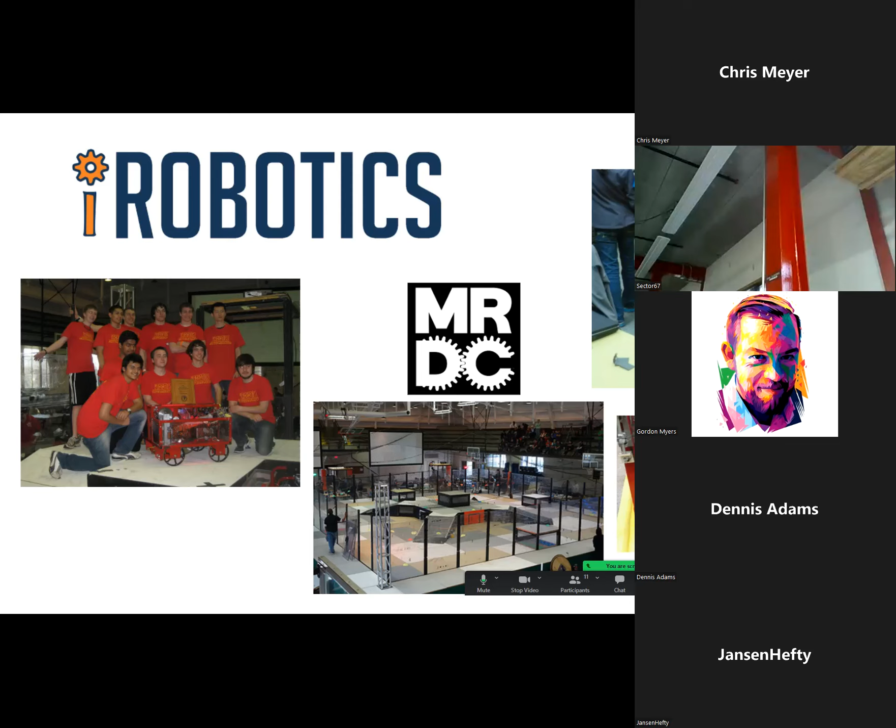It needs some repairs and some dusting. We got a control board donated to us from National Instruments, and it was programmed and controlled in LabVIEW. Well, I don't have a LabVIEW license anymore, so when we have people over for dinner and I want to show off the coffee table that can drive around, I can't drive it anymore. So one of my unlimited list of projects is to put an Arduino or something else on here that I can actually control without having to have a license for LabVIEW. But that robot is still intact, still here.

Another thing we did too with iRobotics was Vex U - Vex Robotics started up a college level competition that uses Vex components. You know, they like that because they make a lot of money off of it. It's very similar to FIRST, so I also did that.

While I've been competing, I've also been giving back and volunteering, primarily in FIRST, and I've been doing this since I graduated. Actually, even when I was still in FIRST as a high schooler, I was teaching Lego programming classes because that was the thing I was really into when I was in Lego League - the programming side of things.

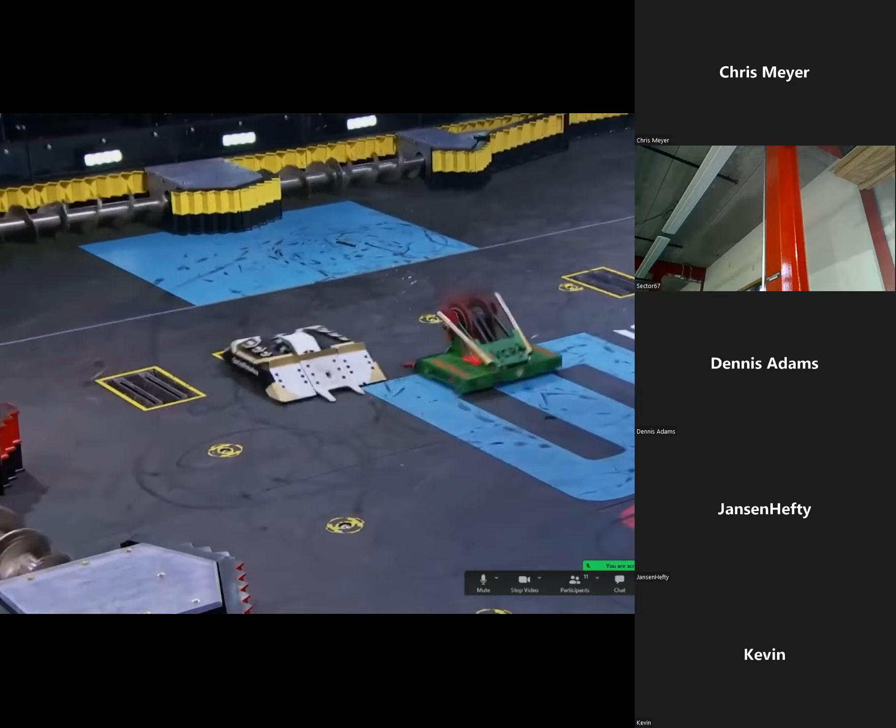Yeah, Deadlift wasn't able to get underneath Jackpot. Now it does, almost got a lift there. Using that flaming lifter, and then goes weapon to weapon.

Deadlift trying to take Jackpot for a little spin. In the meantime, the mini bot just running rampant.

Yeah, Jackpot having some drive issues here, Chris. Yeah, it's got that weapon fully fired up now, but it can't get pointed in the right direction.

Deadlift takes Jackpot into the screws. Great hit there by Deadlift.

Yeah, Jackpot is having major drive issues, Kenny. Yeah, they really are. Looks like they're having an issue on that right side of that bot there.

It's actually the mini bot of Jackpot that is the most aggressive. Gets under Deadlift, tries to high center it, but Jackpot cannot work its way over to Deadlift.

Yeah, Jackpot is completely off balance, getting that gyroscopic motion going. But how about that mini bot from Jackpot getting it done? Jackpot trying to get Deadlift on top of the upper deck, but Deadlift...

Oh yeah, look at the pretty sparks, and there you go. Jackpot nailing Deadlift right in the kisser. Jackpot coming right back into this fight now.

Deadlift, those dice are bent in front, and takes another shot. Here they go, Jackpot making a comeback. This is much better, landed some great shots here.

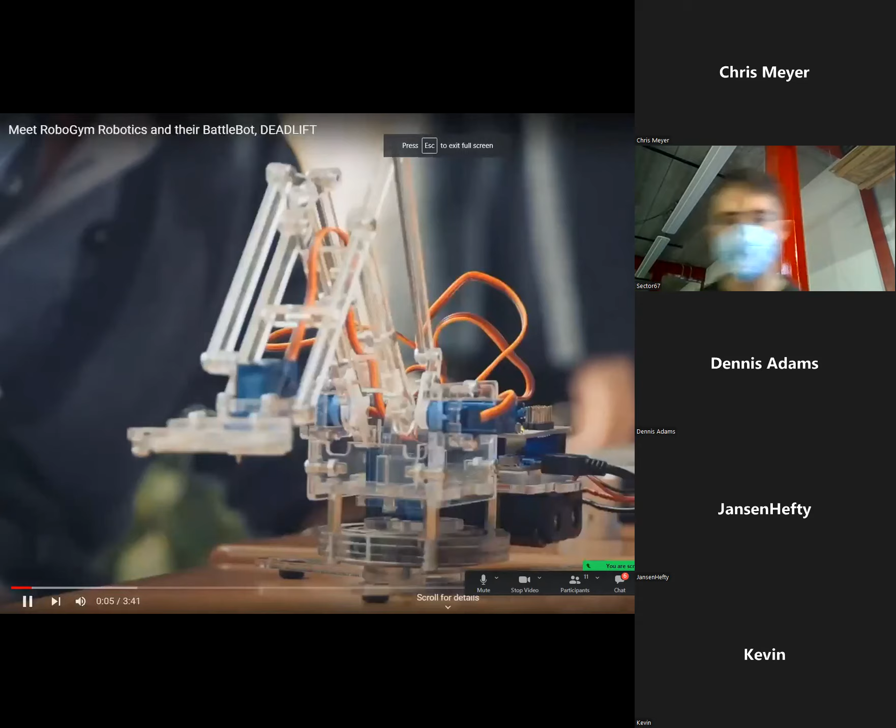This was shot here in Madison. Most robotics competitions and whatnot, it's very task-based. So the robots are asked to do like grab a ball, put it in a hoop, do something to that effect. Whereas combat robotics is...

You're just going to smash the robot and hope they stop moving so that you can win.

So I'm Ryan Shulsky, and I am the captain of RoboGym Robotics.

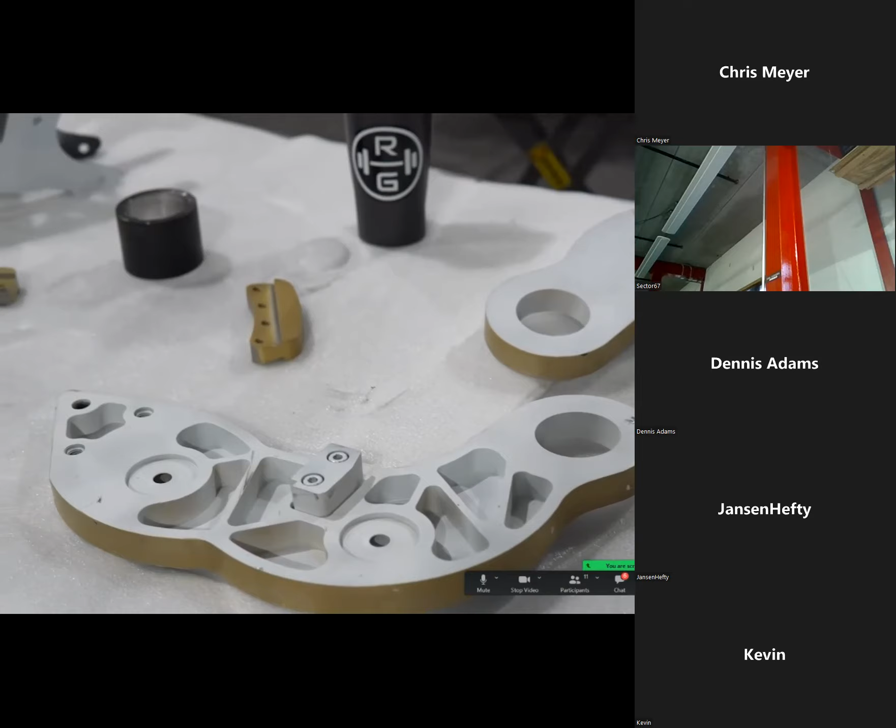I didn't get into robotics until I was in college. I decided to join a group, and we ended up making a robot. I didn't know hardly anything about robotics, so I had to lean on insight from other members.

Hi, I'm Alex Cutie. I'm a mechanical engineer, so I'm kind of the creative genius of the group. I'm Dan, I'm the driver of Deadlift, and I'm the team angle grinding specialist. My name's Michael Rouse, I work on the mechanical design, CADing, and some building of the robot. Hi, my name's Matt Burkle, and I'm the one non-mechanical engineer. Those guys are all the mechanical guys, but I'm the guy who does the most machining, so the mechanical wannabes, or maybe I'm the mechanical wannabe.

There's a weird dynamic. Even before Deadlift was built, we called ourselves RoboGym Robotics, and a lot of that was because in college we had lifted together.

We competed around the country for the first couple of years, building various sizes of robots. Combat robotics has different styles - you have the really aggressive bots with hard-hitting weapons, your spinners, control bots, lifters, grapplers. There's a range of offensive and defensive strategies.

I think the coolest moment is always when we fire up the flamethrower for the first time. Wow, this thing is going to be great.

So we were building a robot in my garage here, and we needed to get parts shipped to here. We ended up switching over to Fictiv for our new configuration because there were a lot of tolerance issues that we had from previous manufacturers.

The damage is huge after every fight. No matter what it is, things get bent out of shape, things get broken off, and you don't have an unlimited supply of spares. That's where the Fictiv process has helped us the most - having that feedback on our parts and being able to make changes on the fly quickly in order to wrap up a design.

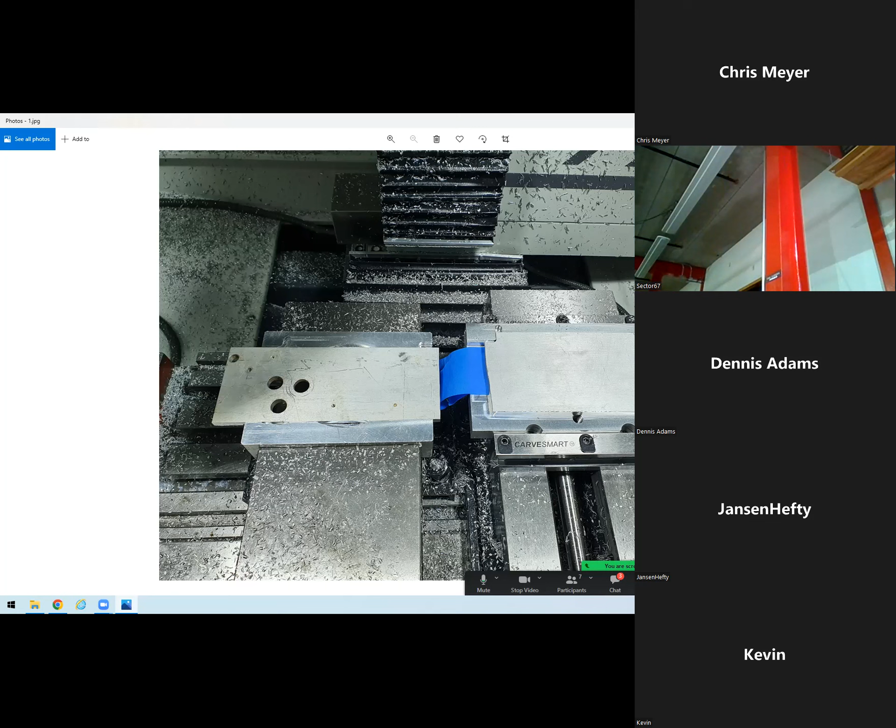So here I kind of started with, on the left side, I've got a set of jaws in a vise, and I'm just holding a piece of material. This is all just nonsense material that I found and begged, stolen, borrowed. Some of it came from here, some of it came from wherever. So there's holes all over it, and I'm just kind of getting the feel for what's going on.

So, the first operation—oh, I forgot to do, I had some pieces that I forgot to bring. And I guess underneath the blue tape, you can see that the first operation on any one of them is to do the chamfer on one side.

The big trick when cutting a batarang is that you're cutting material around the whole thing, so you don't have a nice little block you're holding onto where you mill out a pocket and drill some holes. I've got a couple of these you can pass around, but they're crazy sharp, so be careful, mainly at the tip. Anyway, I was experimenting and got a couple cut, but my scrap rate ended up way too high.

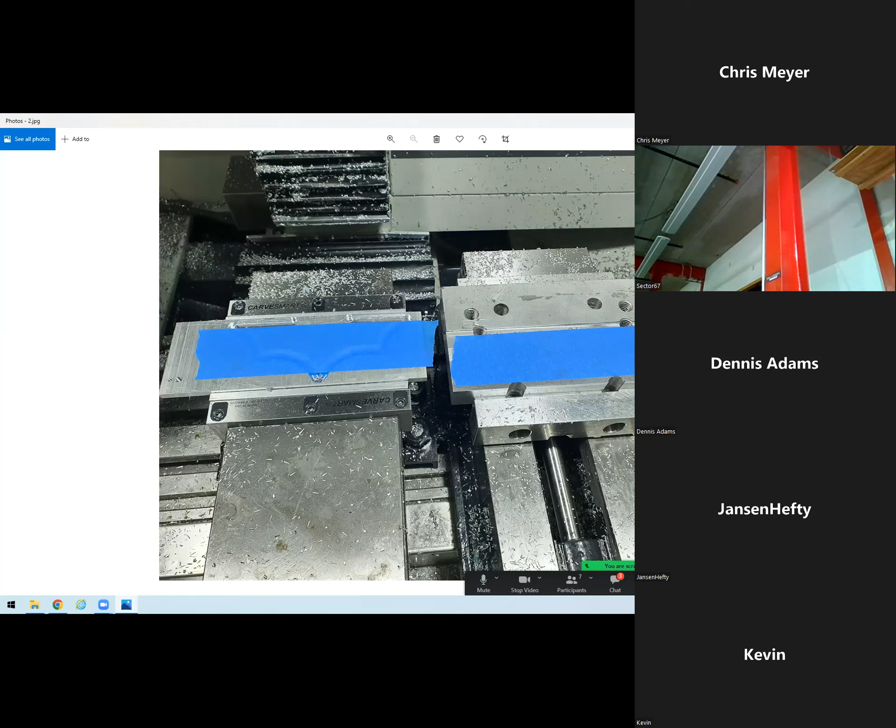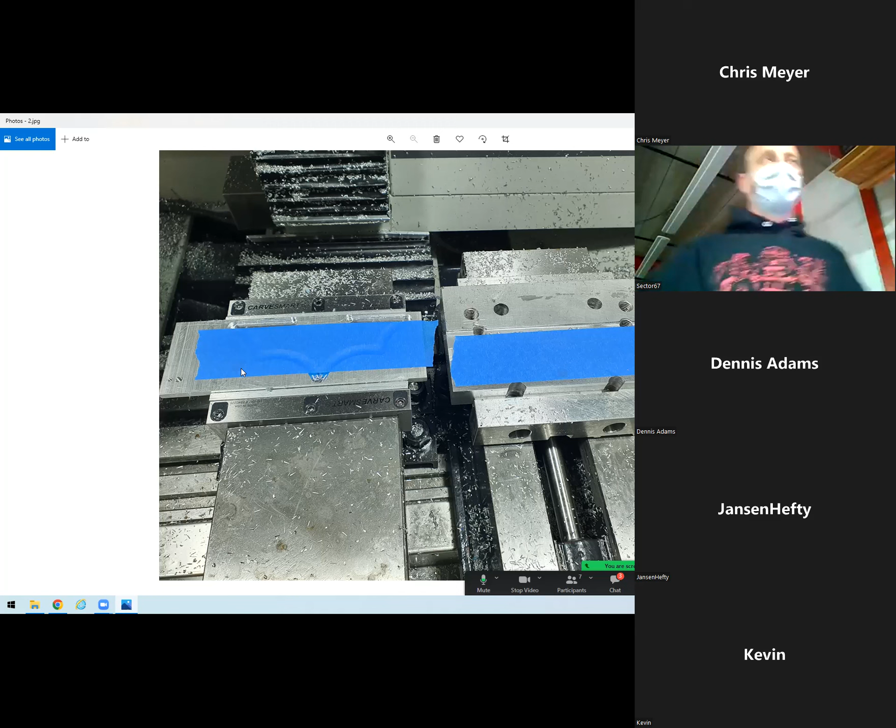In this one, you can see the top chamfer cut. I cut down with the 1/4 inch end mill to clear it out, then come back and do the chamfer cut, using super glue to hold it down for the next round so you can cut it all the way around—that's what the blue tape and super glue is about. This is a hunk of aluminum I milled flat and put a shoulder into. You can barely see it underneath this hole, but what I'd do is drill a locate hole in the first operation and then probe off of that once I flip it.

I learned a crap load about work holding and milling—don't use flood coolant when doing the super glue technique, because I kept delaminating the blue tape and tossing parts into the wall. That's why half of these are done and half failed somewhere through. I'm not going to talk about how much money I put into end mills for this project, but I learned a lot, so it's worth something. When the part goes flying, the end mill's still engaged, so it goes flying too. There were a few times I was really glad I had an enclosure around the mill that kept things contained.

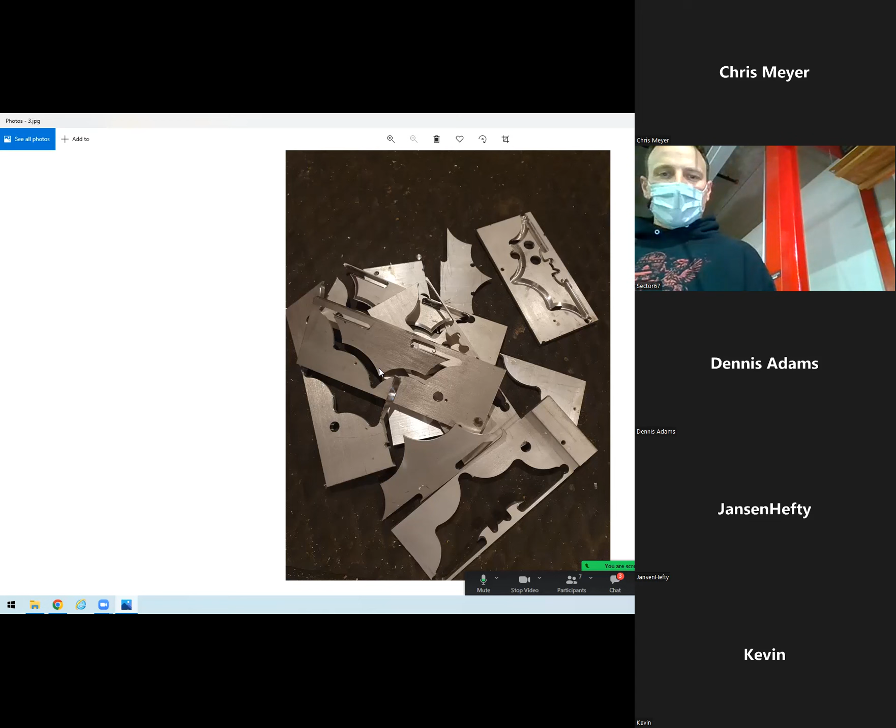Eventually, after I had an awkward pile of these, I decided to ramp up production—because what else are you going to do? That's when I started laying out a full sheet. This is the full working envelope of a 770 that I have at my disposal, and I went with, how many can I stuff in here? If you look closely, there are two different sizes, four big ones and four small ones, just to stuff in there.

I went down that road and laid them all out into a kit. The fun part is I use Fusion 360 for a lot of CAD/CAM work, but Fusion 360 has no idea how to deal with a chamfer, as far as I can tell. You can chamfer a hole, but if you want to follow a chamfer around a shape with a chamfer bit, no idea what to do with it. I've talked to everybody and their brother at work, and they say oh you gotta do this and that, but nobody can tell me step by step how to get it to work.

So I did something crazy for this day and age—I went to conversational on the mill and did it manually, because I knew I needed a certain depth of cut and a certain offset. I fudged all my tools: I've got a 3/8 inch end mill but told the controller it's a 64 thousandths diameter end mill, and put it on the outside of the line. That gets my tip 32 thousandths off the centerline, and because of the geometry of the tip, that gives a nice flat clean cut on a 1/4 inch plate of aluminum. There's some fudging involved—I had to tell it really specifically what I wanted instead of letting Fusion figure it out, which sometimes it does well, and sometimes it sucks at.

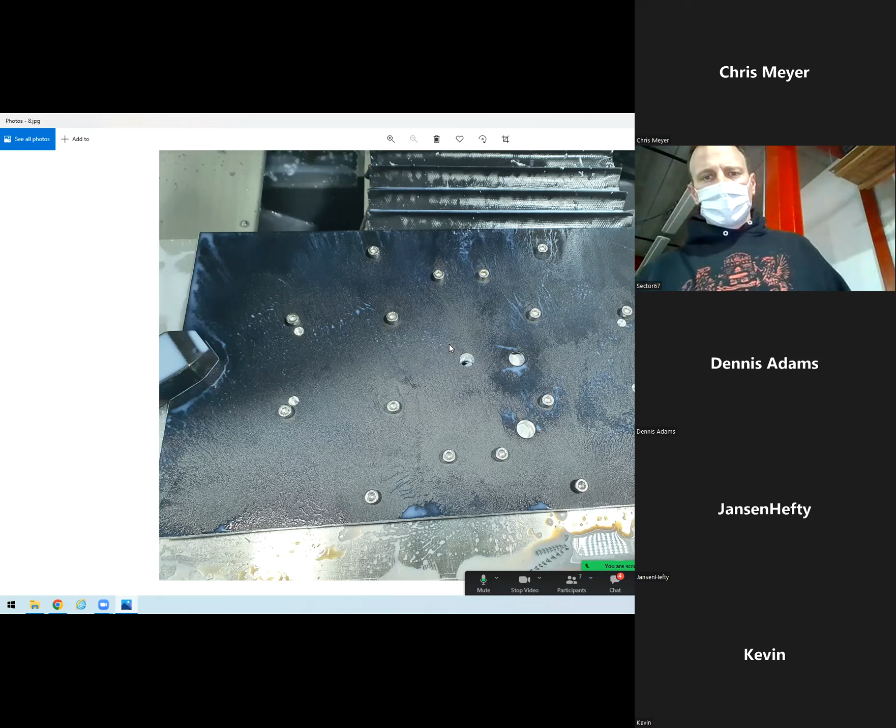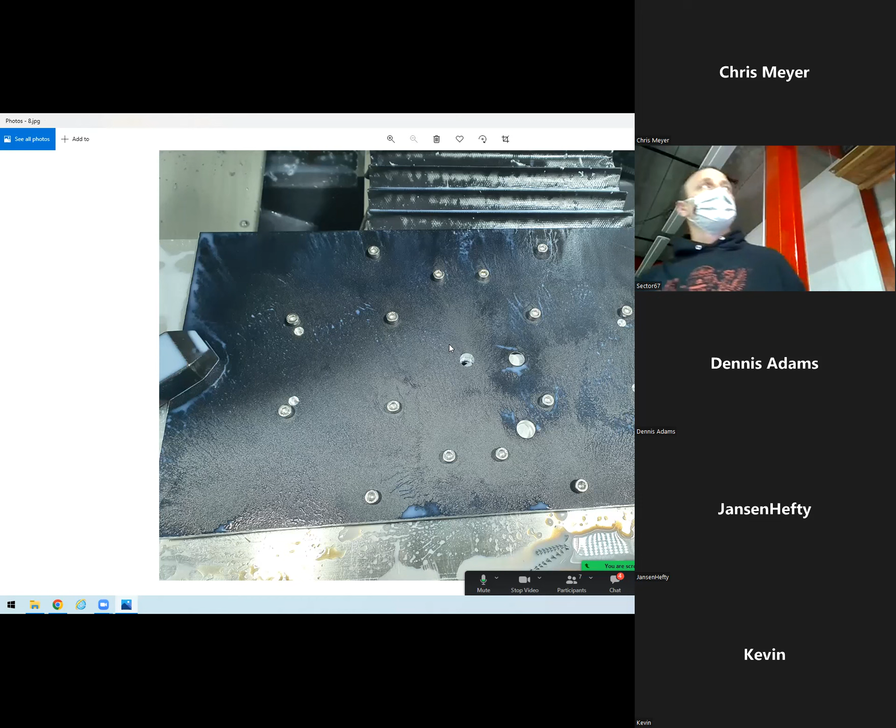I guess I just realized I didn't give you a picture of the fixture. Underneath here is a fixture plate, which has a bunch of tapped holes and a center locate hole. The first thing I do is locate off that center hole in the fixture when I first come on. And then I actually kind of have to—this comes later.

So this is the first iteration that I did. You can see these screws here—I figured out too late in the game that they were right smack in the way, so I had to change some stuff around as I went. But this gives you an idea. And this is another thing I learned on—this one was all blue taped up.

I specifically did it so the tape doesn't split on the batarang, because the glue will squidge in there and then you have a dorked up surface finish. So I go through extra pains to do that.

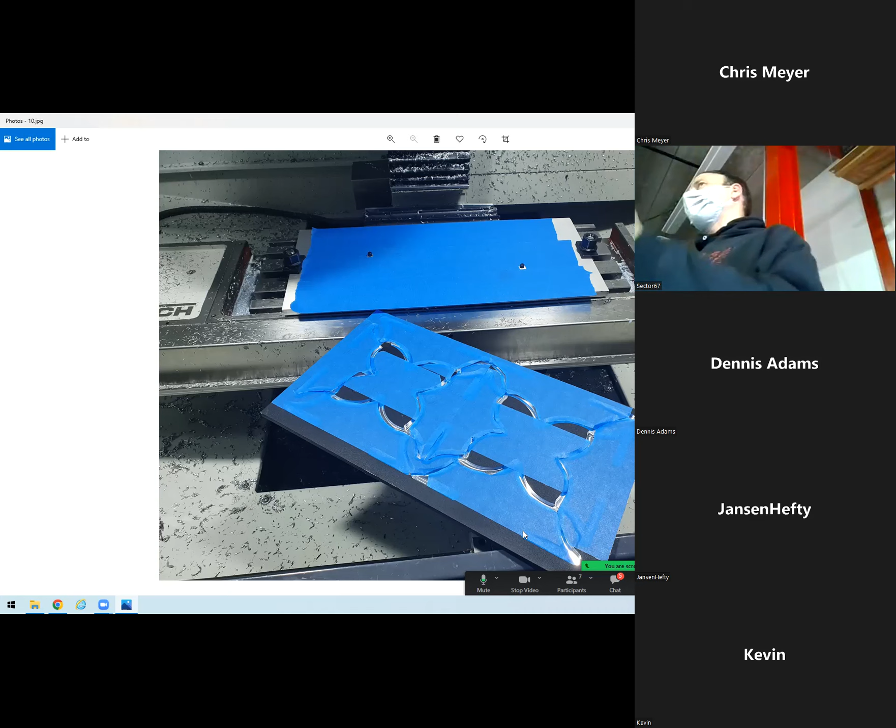So one at a time, I could do one side, glue it, do the other side, over the course of about 45 minutes to get one. Now I've got it where I can do a plate of them in about 1 hour and 10 minutes and get 8 of them. Most of that time is either the machine running on its own or messing with the tape and the super glue.

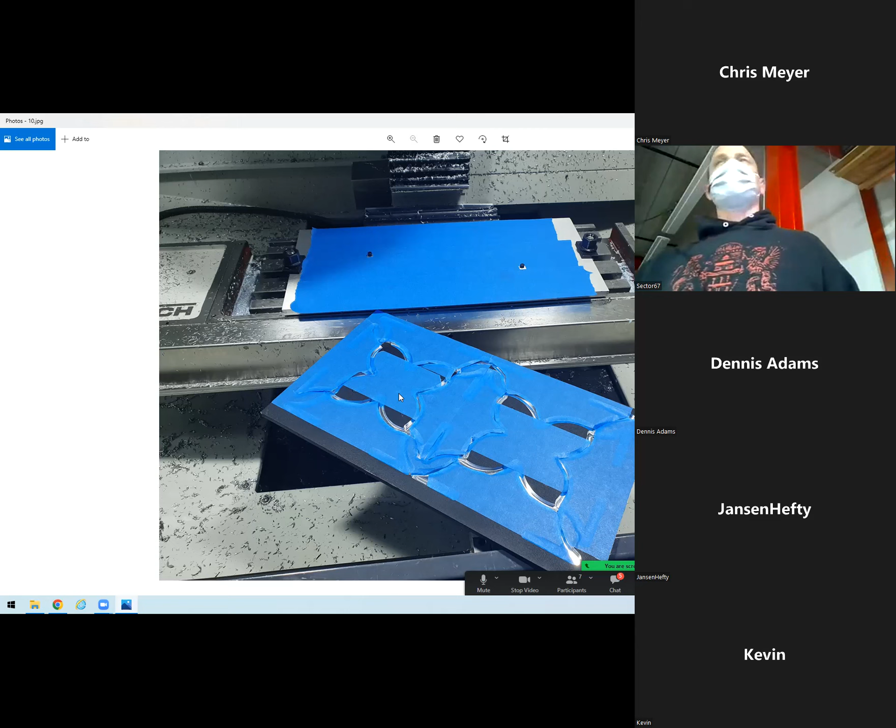And then in here, I was trying to do locate holes. So I have these little 1/4 inch diameter pins that are locate pins. I actually made the holes in the plate 2 thou oversized so it would snug on there. I don't know if I was getting super glue in there or if my bit was wearing out—I was getting a little bit of wear. Anyway, it kept getting tighter and tighter, and it just became a pain in the ass to work with.

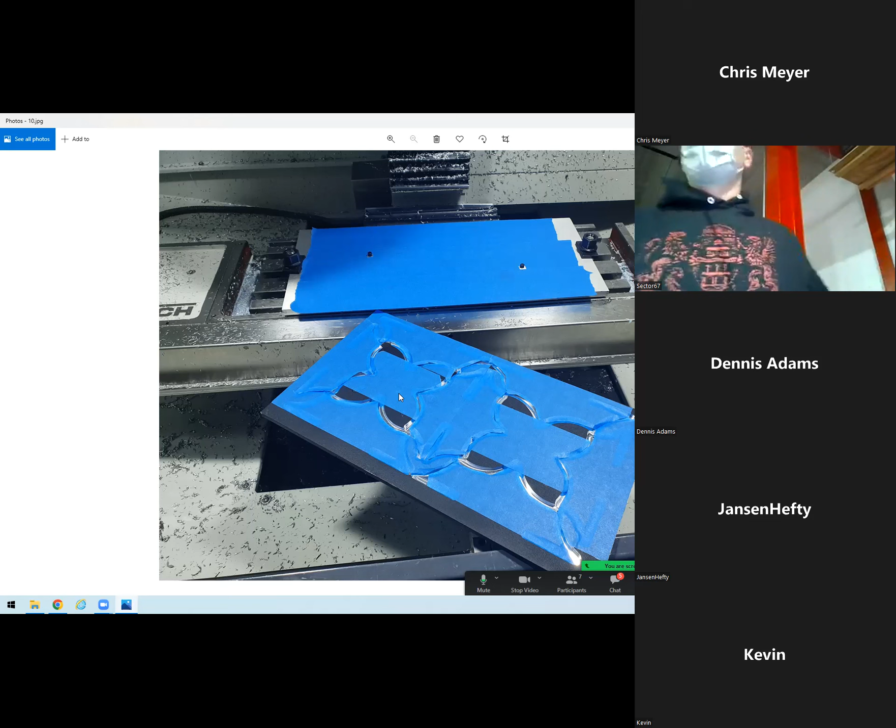That's when I figured out to do the square holes in the middle. So in the fixture plate now there's 3 pins—you can't really see them here, but there's 3 pins, 2 on the x-axis and 1 on the y-axis. So when I put a sheet down, I slide it into the corner, and that's my locate. Then once I probe this center hole on the first op and the second op, I can just kind of do this indefinitely.

I don't really get that much continuous time to do this, so pretty much I'm probing every one, but the theory is if I was doing these all day, I could just set it up and go.

How do you get those sheets cut to the perfect size? That's the end—I'm going to get to that. That's the good part, the tips and tricks at the end.

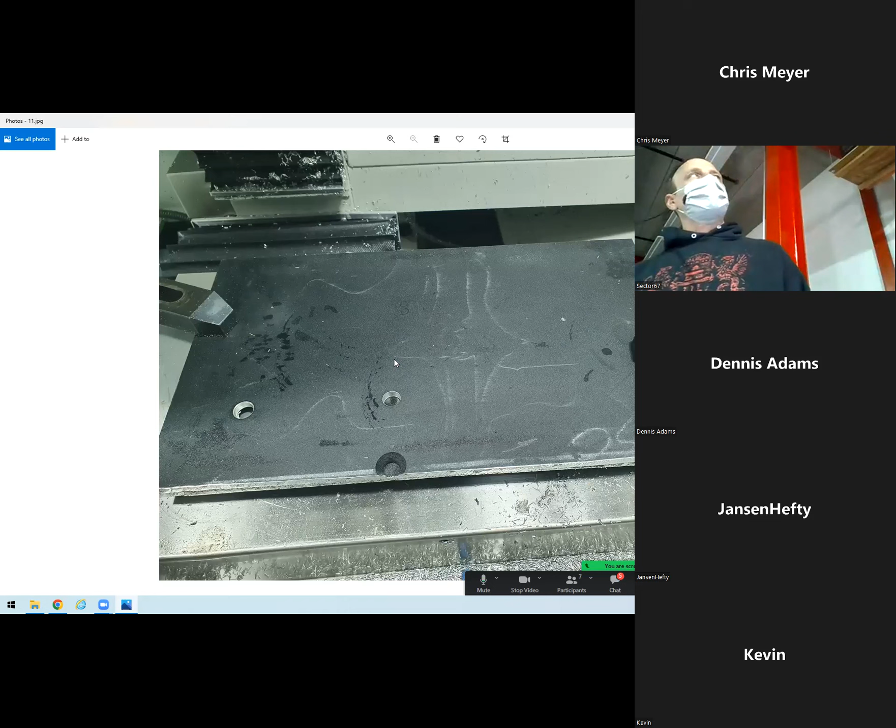So I've got the sheets cut down to size, and then I have to do a few operations. Op one would be just to get the thing ready, to poke all the holes and to cut my locate squares.

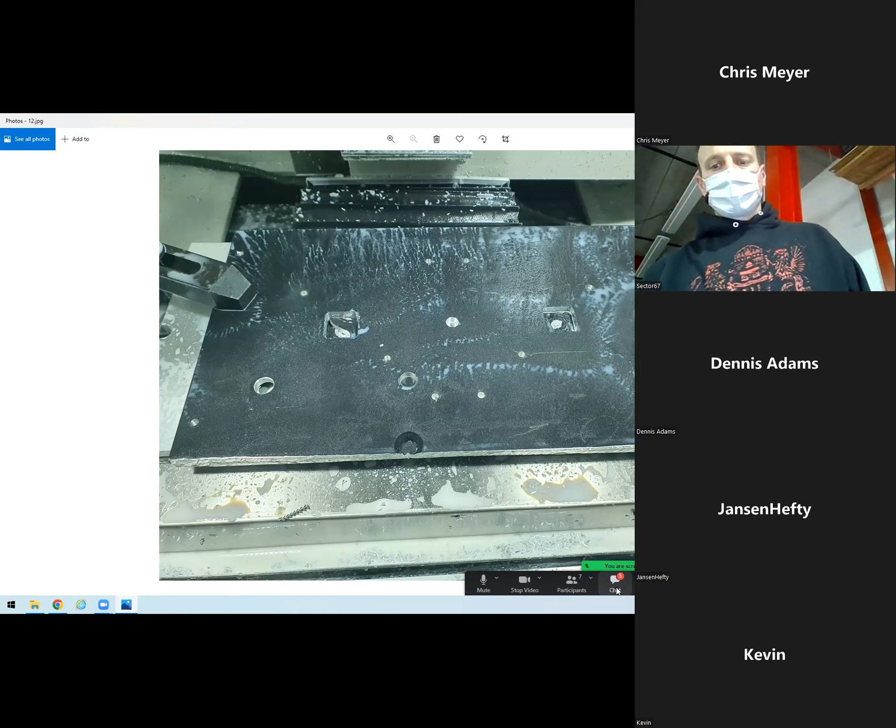If anybody in chat has a question they want to see, you can just holler at me. I don't really care, I'll check the chat at the end or in a few minutes. Currently no questions in chat, we're just yammering amongst ourselves.

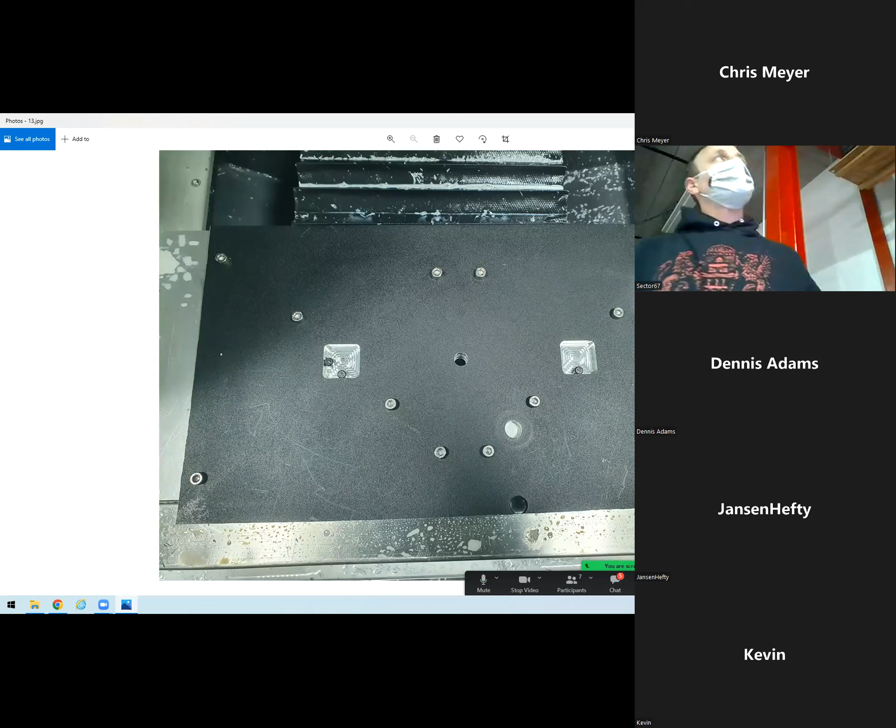So this is after I do the first op to get the material ready, and now I'm ready to actually start cutting. This is operation one. From here, this is where I'll tape it all, tape the fixture plate, and then flip it and glue it. Then I'm ready to do op two.

I purposely keep all the finish cuts at the end, partially in hopes of getting a good surface finish, which I haven't gotten yet. If you look, I think I'm going too deep on my cuts or too fast. I've got to play with that recipe a little bit.

Then op two kind of just does the rest of it. There's a few things - another one I learned here is this center. These screws, if you look real close, the diameter of this screw head and the diameter of this piece is just slightly different. So every screw I have now, because I've done this a handful of times, has a side shaved off of it. My next move will be to pocket these out like I do on the center hole.

I think the center hole, yeah. So now, because I actually started tossing them, I've got too much interference here with cutting and not enough glue and work holding in the middle, and I can't get screws here because you don't want an eighth inch bit that's this long, you're down to the collet and all this. So this is the only bit of CAM I did in Fusion, was just to pocket out this hole before I come in, and I slightly undersize it. So when I come in to cut this out, there's no material in here to toss, because I was losing the center ones that would get tossed on that end cut.

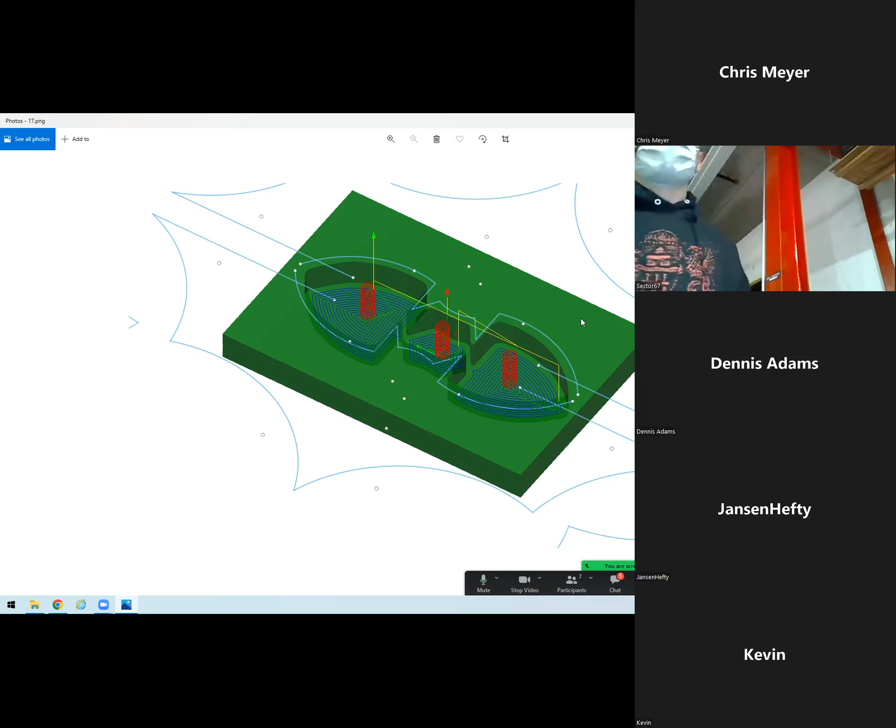I want to do that again for, I don't know how much the people at home can see, I'm going to do that again for these here, just to get rid of them so that I don't have to hold those down.

The pieces remaining become a problem, because he's cutting them and there's still material there that breaks free. That's why he has to have all these screws all over the place, to hold the scrap in place, so the scrap doesn't screw everything up with the real pieces.

Since I'm making throwable pointy things, obviously the next move is to turn these center pieces into their own stars. I just haven't done that yet, I apologize - that's the next move, because it lends well to that. It just happened to be the void. I didn't even notice it until I cut this one, and I was like, oh, that looks like a throwing star. So that'll be my next move.

Can you explain again the square in the center? Like, why couldn't you just indicate that with a round hole and flip it over? You mean this square here? Yeah, you can talk about it. Let me see if I can get a better picture.

So now I've got 3 pins here, one that rubs this side, and then 2 that hit this side. So then when I put it down, I can push it away into the right, and then it locates into those pins.

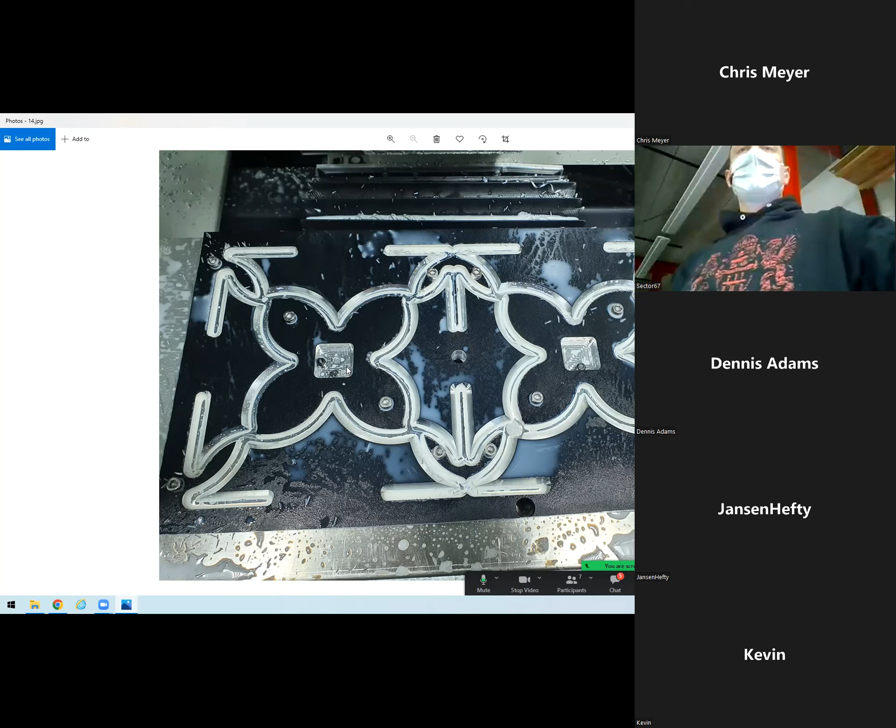Because I'm using the full working envelope of the machine and the full throw of the bed, I could also do it on the outside of the material, but then I'd need a machined edge on that material. This way I can control the flats that I'm interacting with, and it's just a little bit of extra cutting.

Looking at it now, I could probably make those holes different and smaller. If I was ramping up for a production of hundreds of thousands, then these holes would be a lot tighter to the pins.

This is just kind of a repeat of the pictures you've already seen. So yeah, this is what it looks like after I remove all the junk.

Needless to say, I've got batarangs for days. I'm going to put them out, you guys are welcome to take one. I really don't care. I'm going to continue to make more until I figure this process out because it's fun.

I'm not going to do that, mainly because I don't feel like it. My little brother sold one for $12 and he promised me four, and I still haven't seen that yet.

So after he's done getting the product liability insurance. One of the cool parts is, obviously I didn't do any of this at Sector67, I have the CNC capabilities at home, which is pretty awesome.

One of the benefits of my membership here and what I do here is I was here for a work day when we were working on fireproofing some beams, and I happened to kick into a sheet of material. It's 0.262 inches thick for whatever reason, I think it's painted because it's got a texture to it, I don't think it's anodized.

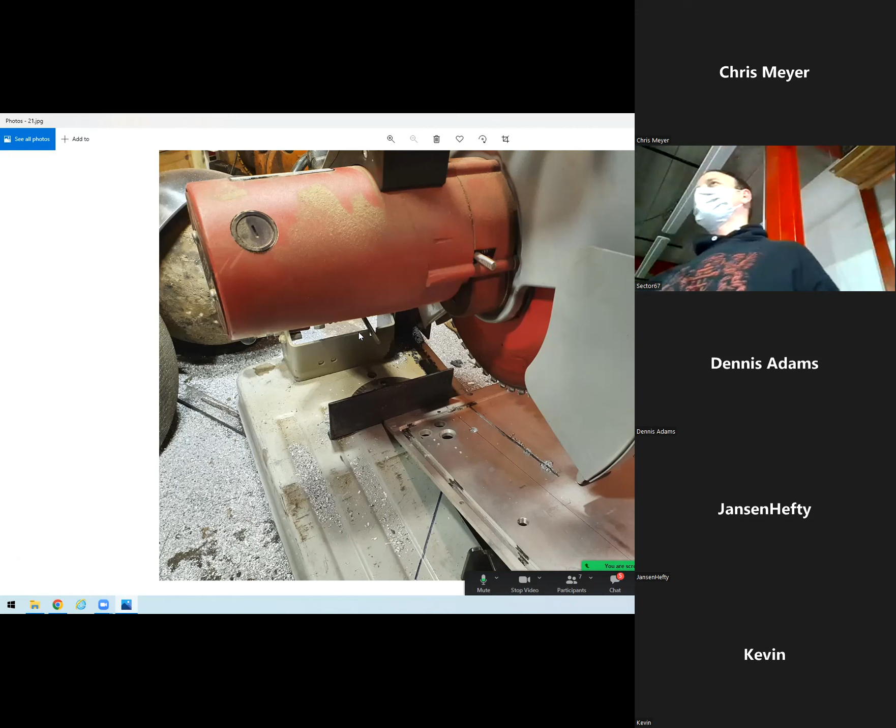So this is back to Chris's point, this is the bonus tips and tricks. I have this chop saw, an abrasive wheel saw that I put a carbide tooth blade into, and I was like, it's amazing that I didn't lose a finger, and please never tell my wife I did this. But I was hacking this material into pieces on this drop saw and holding it in really precarious ways and removing parts of the saw, it was just terrible.

That's when Chris enlightened me to the fact that aluminum can be cut on a carbide blade in a wood saw if you wax it. So to get this massive sheet cut up, I just took my regular old circular saw from cutting plywood, and I took paraffin wax and tapped the trigger, stuffed the paraffin wax into it, got that blade nice and gooey, and then it cuts like butter. It was amazing, so if you ever have to cut sheet aluminum...

This was after about 2 days of convincing Davey that I wasn't trying to sell - well, because he said we've got the Milwaukee saw, and I almost came to borrow the battery one, or brought the sheet over here, put it on the plasma, the water jet, all this other stuff. So that was pretty cool.

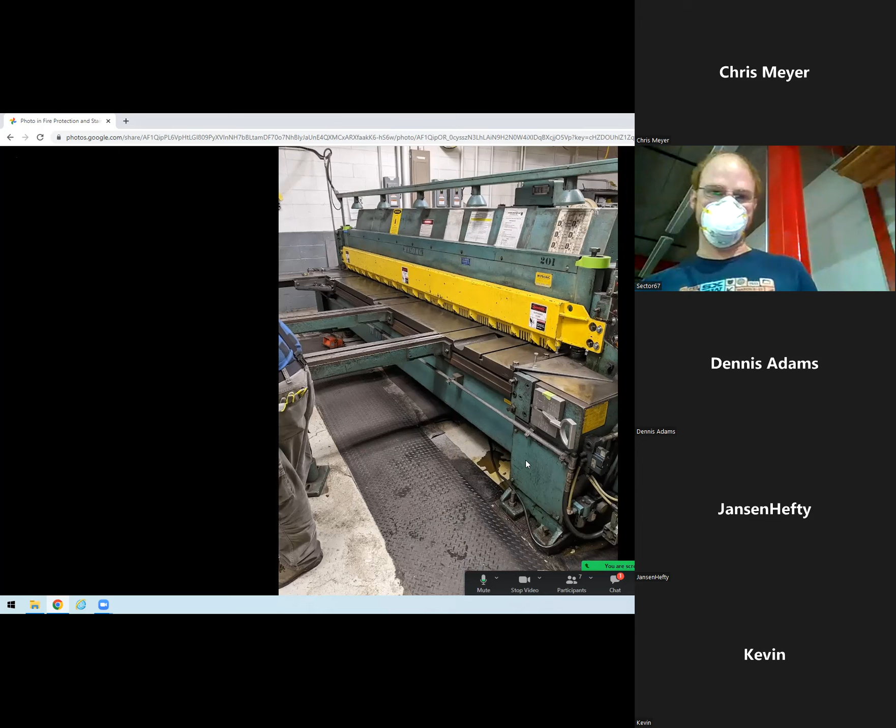So they have big machines like this thing, a 15 or 20 foot shear. We were loading the diamond plate into the shear and then shearing it into 44-inch by, I forget what length, pieces for each of the steel treads.

I'm going to skip a step, which is bending, because I wasn't there when we bent them.

Separately, Advanced Concrete Solutions in town was kind enough to order us some steel on their account, which saves us about $2,000 because they buy a ton of steel and we buy none, so we get totally murdered on pricing. These are the stringers, the side plates for the stairs.

And this is the stair landing, which was built out of scrap from that assembly manufacturing company. They had some decking that they didn't need.

We laid out all the steps and realized they were slightly overbent, less than 90 degrees when we needed them slightly greater than 90. So next time we bend more, we'll bend them slightly over 90 instead of slightly under.

So we manually unbent them with a crescent wrench and a pipe wrench, which was lots of fun. We'll probably use the brake to unbend the next stack of 16 of them instead.

So this was this weekend, there's a pipe wrench on there - you can see the huge pipe wrench used to unbend them. Turns out the brake does a whole lot of work to bend them in the first place, so unbending them is not great.

We were using ratchet straps, a bunch of lasers, and a lot of eyeballing to get the steps square, straight, and in the right spots. Sean said we were off by about a quarter inch over the run, which is totally in spec for wood, but for metal we really shoot for thousandths. So we're a little disappointed.